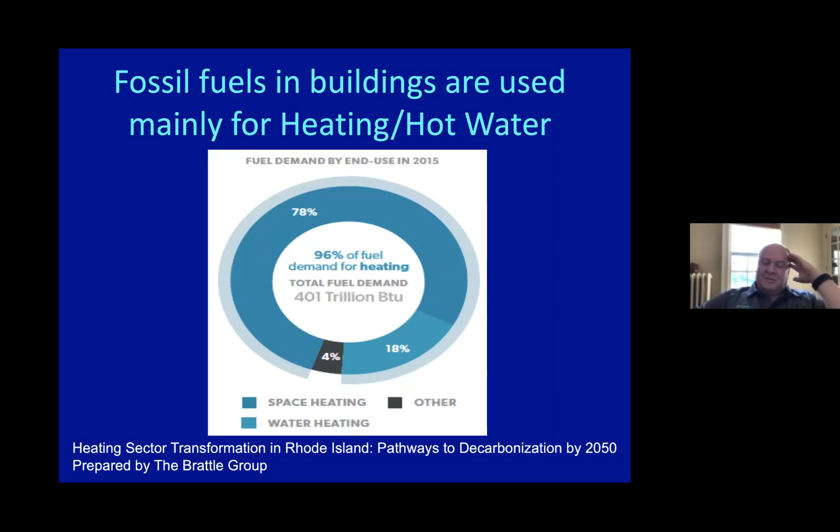And again, these are three different reports which were published. We'll talk about the New York State Independent System Operator Climate Change Impact Study, the first phase, their estimation of the long-term impact. Number two is the current capacity data, which was published with some delay because of COVID. They usually do that in the spring of every year, where they analyze the data from last year and look at their capacity and load data and what the implications are for long-term planning. And then the one I just mentioned is the heating sector transformation in Rhode Island and its pathway to decarbonization.

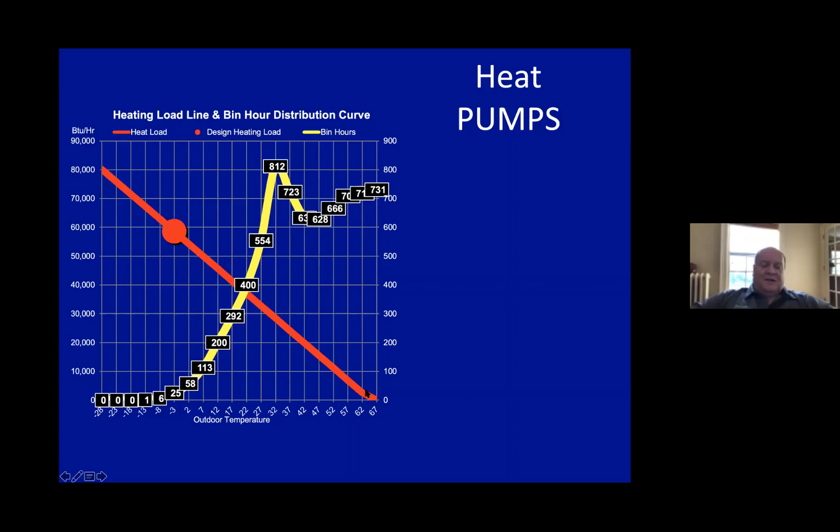So when we're talking about heat pumps, and obviously we don't have many other choices than to go the heat pump route, except doing this with fully electric resistance heat, it is important to understand how they operate and how the heating load might be different. So for example, the red line here is when you start heating a building at about 65 degrees, you start increasing load there. So the vast majority of the time, we're spending between 27 and 62 degrees. And this is when the amount of kilowatt hours we need to satisfy that load is going to be crucial.

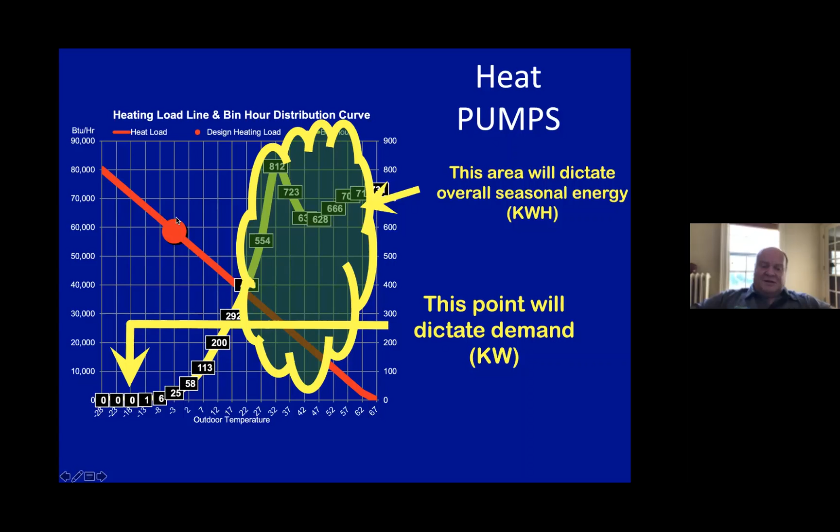The problem is that we're going to have a few hours a year, not too many, which will not look at the overall seasonal energy we use, but it's actually the so-called demand, which determines the amount we need to size the system for to cover the colder days of the year. So for example, we are seeing hours here beyond our design criterion. For example, in Buffalo, we're talking about 6 degrees, but we have days where it's -12. So we have to go beyond our design criterion.

Now looking at the demand, and why demand is important. Every single country who has actually transformed the heating process from fossil fuels into electrifying it is looking at a shift in demand. The best examples are Scandinavia, but all other countries which are starting to go into that endeavor are seeing their peak heating, their peak demand for electricity, shift from the evening hours into the morning hours, usually between 6 and 8 a.m.

The main reason for that is that the domestic hot water is shifted and now becomes electrified, but also that people sometimes use a setback during the night and then start to rev up the heating systems again, and the same is occurring for the office space.

So the point of the presentation is that replacing the propane and oil heating systems in New York State with either an air source heat pump or a ground source heat pump will have dramatically different results. And I'll walk you through why that is.

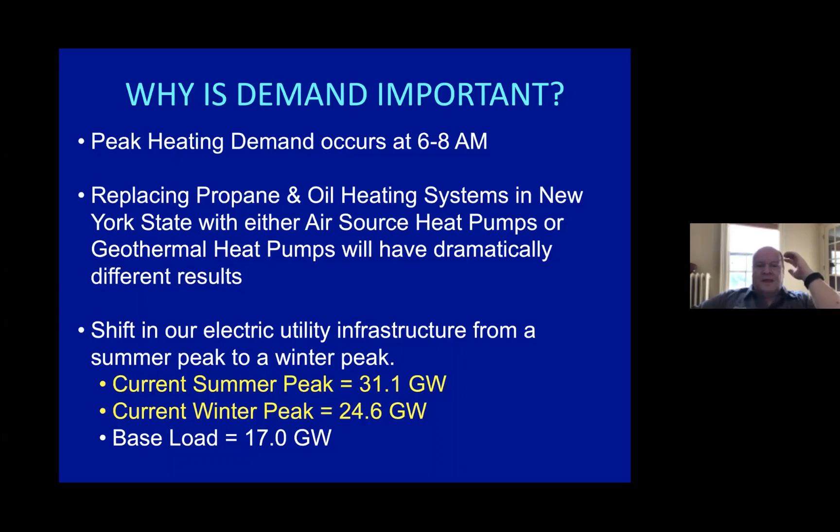However, air source heat pumps, and those are now the mini splits they took as an example, are decreasing that capacity significantly because they use the outside air as a source. The ground source heat pumps use the ground, which is stable. And in all the studies we have seen and done, and outside companies have done on behalf of some stakeholders in the state, et cetera, they have confirmed that the ground source heat pumps do not lose their efficiency or capacity. However, air source heat pumps do both.

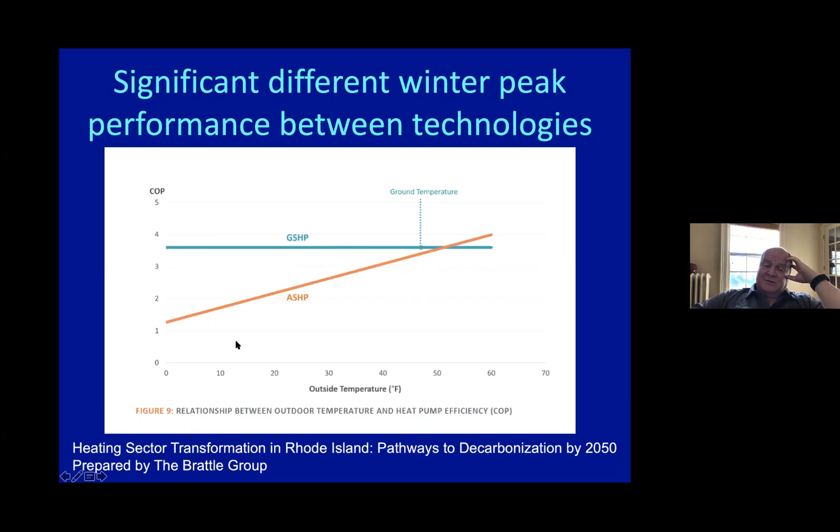That means they operate less efficiently because there's simply less heat outside at lower temperatures. And they go towards a COP of 1 when it gets down to around 0 degrees outdoor temperature. So just to point this out further, the efficiency and the capacity is dependent on the source temperature. That means the temperature of the ground in terms of ground source.

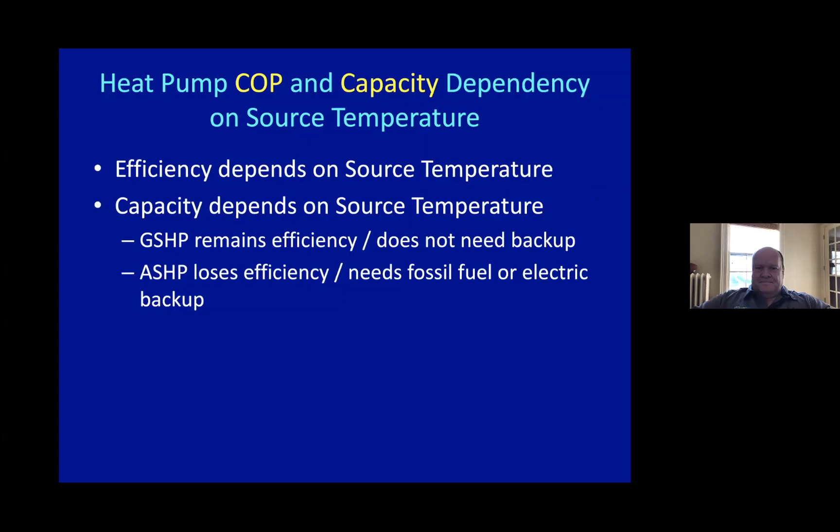And this is one of the reasons that the capacity of the heat pumps for ground source is not going down on colder days, and they don't need backup in order to be operational. And the air source heat pumps lose their efficiency, but they also lose their capacity at colder temperatures. And this is the reason why they do need fossil fuel or electric backup, at least in most applications we're putting them in currently. So that's going to have dramatically different results for the grid and the grid planning.

Not too much, but we saw a spike up to about 26 gigawatts. And that is pretty much the same way we see it in New York State. So the data is almost identical. Now they run different forecast scenarios. They said, okay, forget all of that. Let's not go with electric heat at all. Let's continue our current scenarios and see where we're going to be in 2040, 2050.

And because, you know, there's an increase in population, increase in demand to a certain degree, more buildings being built, they project that this goes up to 37 gigawatts in that scenario. Now, if we are all electrifying this with ground source heat pumps, yes, our overall demand for electricity goes up over the year, which is good. We're going to use more electricity. But then we also see a peak there going up in the coldest days of the year, which is approximately

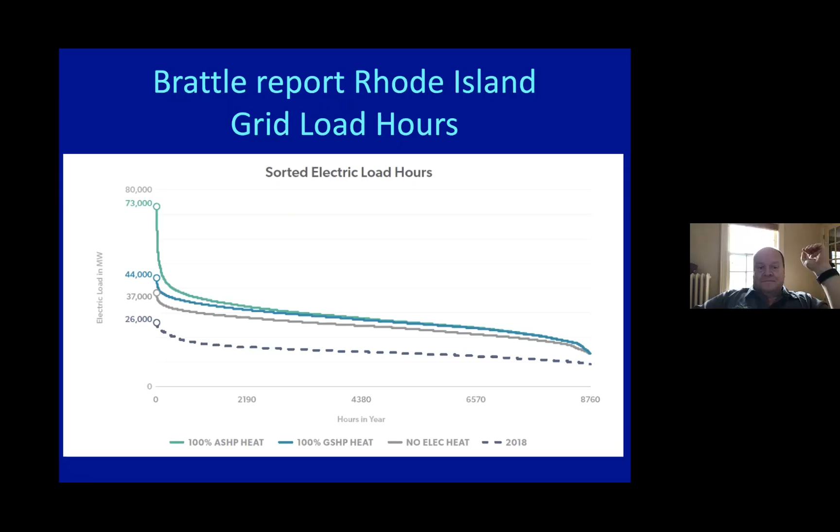So the impact for that is relatively tremendous. If we go this route with ground source heat pumps, the actual energy for the year is not that different between the two technologies. Yes, air source heat pumps are a little bit less efficient. It will need 15% higher capacity than we currently have in the system. And ground source heat pumps will only need an upgrade of 12%.

However, the peak is going to be looking dramatically different. The peak is going to go up by 17% with ground source. However, with air source, it would be going up 94%, almost doubling our readiness and our need for that. The important point from a grid perspective is that our load factor, that means how much percent of the grid are we currently utilizing, would be around 61% with ground source. However, it would drop down to 38% because we would have all this readiness sitting there at idle and not operating. It would be essentially the most inefficient grid you could imagine.

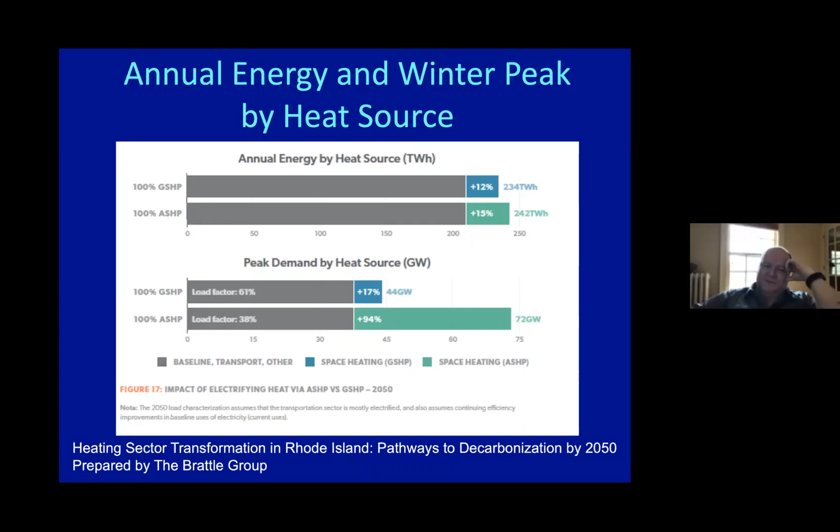And they celebrated this actually because every percentage point cost the New York State ratepayer about $200 million per year, because it is so much more expensive to have all this capacity sitting at idle, and it needs to be maintained and paid off. So having a higher load factor is really, really beneficial. But that's what we would lose here with the air source heat pump scenario because of their lack of efficiency at very cold temperatures, but we still would need heat during that time.

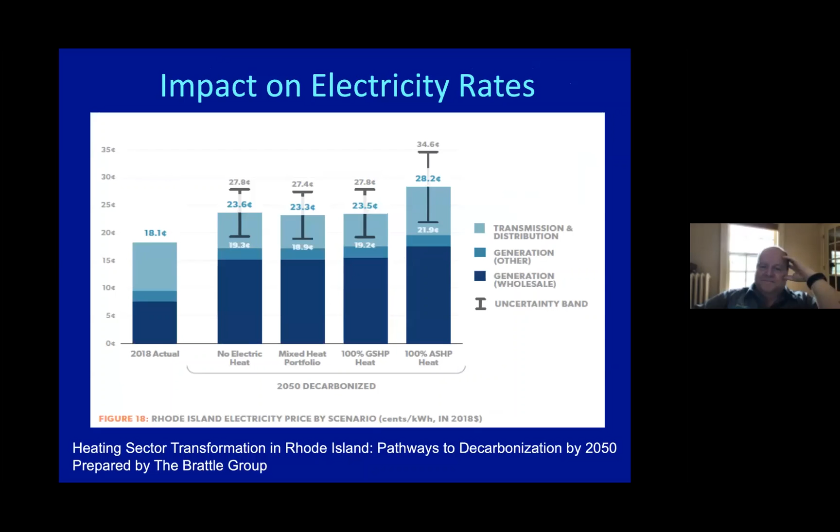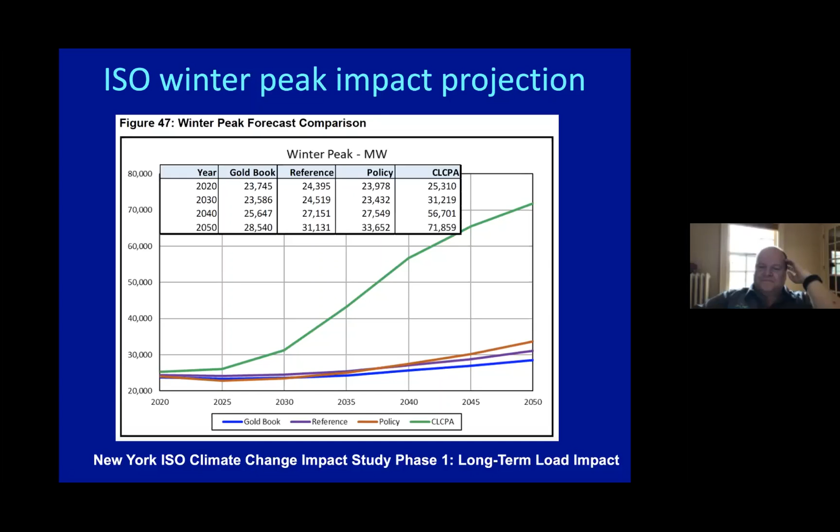Now, this is not the official number coming from the New York ISO, the independent system operator. This is just a study they had commissioned to assist them with their forecast. These are actually their official numbers. This is the so-called Gold Book, which is the Bible for capacity planning, and this is the 2020 load and capacity data. The problem was that they did not have those graphs in there. They only had the data in tables, pretty much at the end of it.

And there was a dramatic difference that 1 year makes between the implementation need for the climate bill and the year before. So I looked at their forecast a year before, which is the blue line. They show an increase in their winter peak going from 25 gigawatts to about 32 gigawatts. And you could say, over a time frame of 25 years, we can see the increase in demand and electricity. But oh boy, when they now have to comply with the climate bill, that changes dramatically, from 1 year to the other. Their forecast planning shows a very different result.

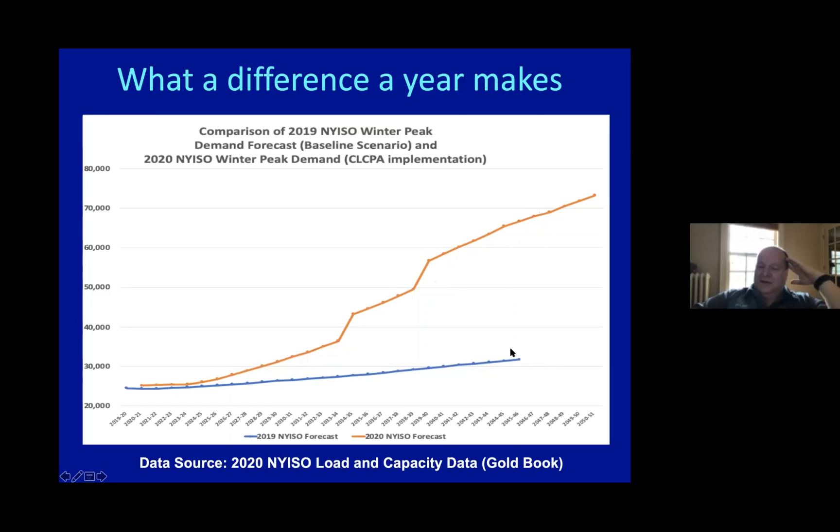They didn't go beyond 2045 in the 2019 period, but now they're forecasting up to 2050 because that's when the climate bill has to be all implemented. And you can see the dramatic shift here. It essentially more than doubles our winter peak in the entire system. The bad news, if I run the numbers, I think it's underestimated by a factor of 2. So I personally think this entire line is much steeper because they haven't fully accounted for the lack of efficiency. They just took manufacturing data and plugged it into their evaluations when it comes to air source heat pumps.

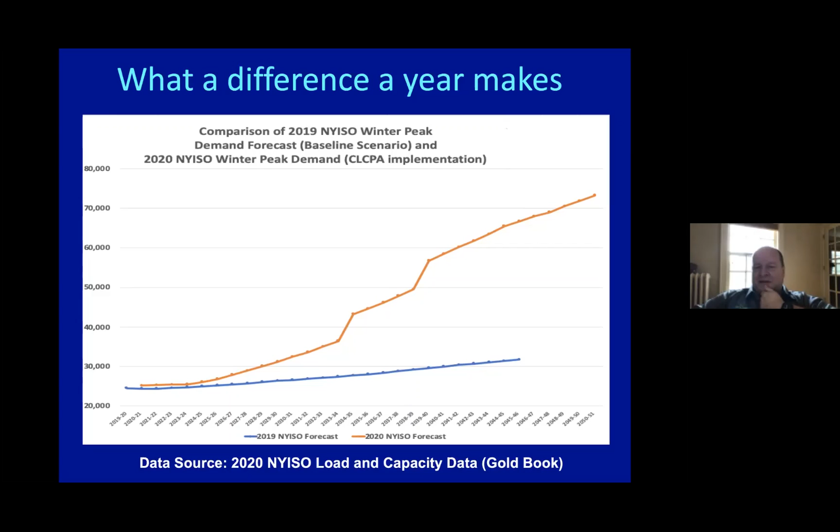We come up with a scenario where currently air source heat pumps are adding about 100 gigawatts to the peak load, and now you're adding the domestic hot water and the electric cars to it. You will find a dramatically different, even much worse scenario than their own numbers indicate. So again, these are their numbers.

So they have different scenarios there, and they carved out the increase caused by electric vehicles and the increase caused by the heating and the cooking and the domestic hot water. And you can see here the impact of the building envelope on peak, not the building envelope, the technology we use for that, is dramatic. Everybody talks about it and says, well, how are we going to have all the energy for the electric vehicles? But that number is dwarfing the impact of the heating sector if this is done by air source heat pumps as well as domestic hot water electric resistance heat.

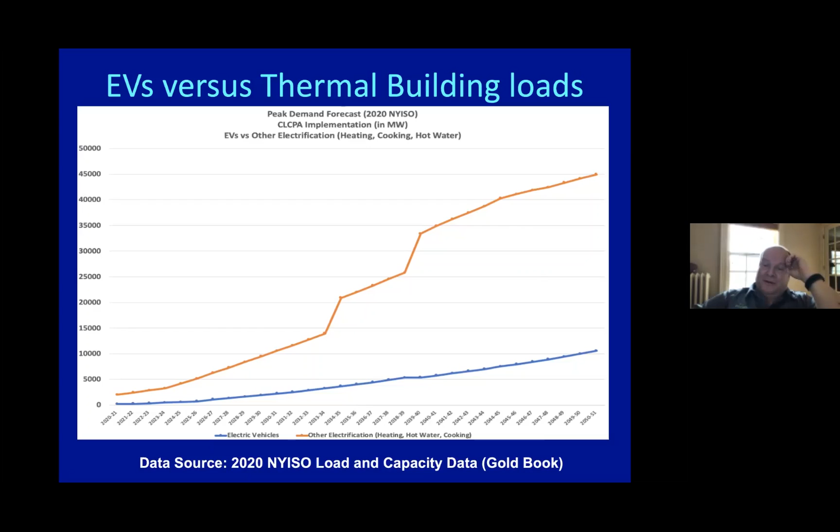Again, these are their numbers. We didn't change the numbers. We just put them onto some graphs to visualize that much better. Forget the need for electric vehicles. It's really the heating and cooking, which is essential in avoiding a dramatic grid impact here.

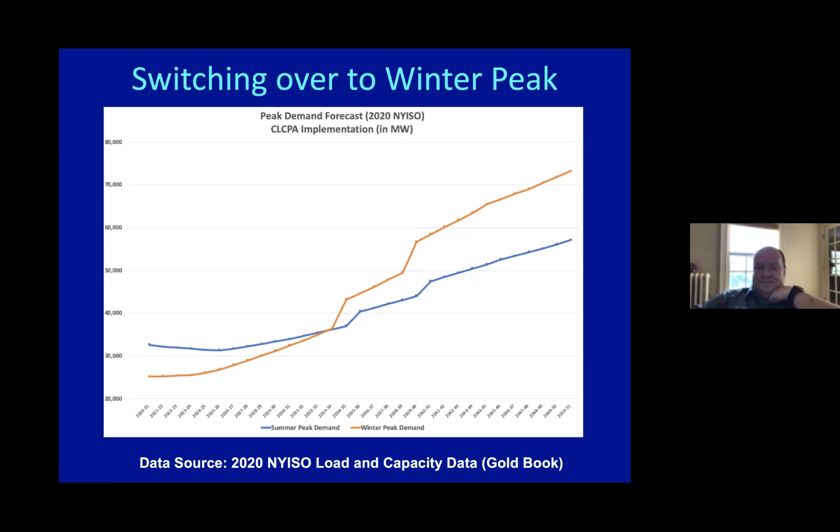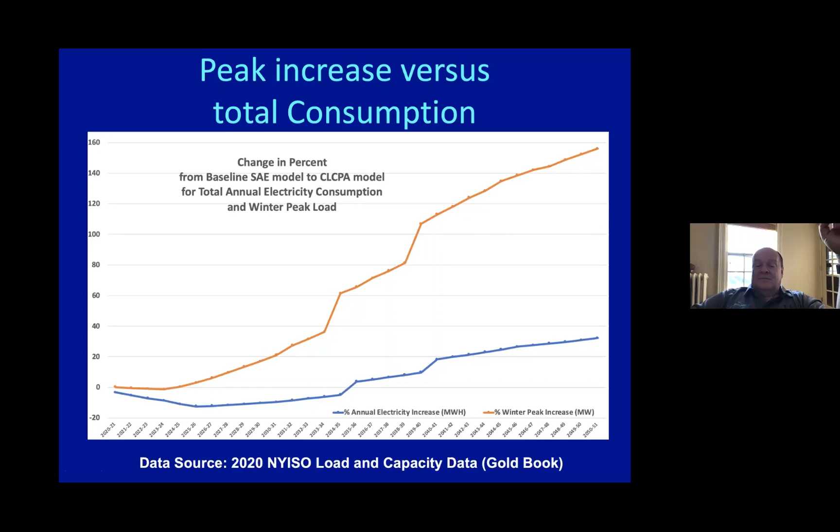So I mentioned before that I personally think that the impact of this is grossly underestimated. Why do I think that way? Well, if we're just looking at the entire heating load, which is now published by, I think it was the Meister Group who did the analysis for NYSERDA, we're looking at different buildings. These are the single family homes. We have close to 3 million in New York State. And then they're looking at the multifamilies, the large multifamilies, and adding the commercial sector to it.

And you can see here the million BTUs they use per year, and this is actually current actual data. We see that the buildings in New York currently have a winter peak of close to 100 gigawatts. And that's why we think the numbers they have are grossly

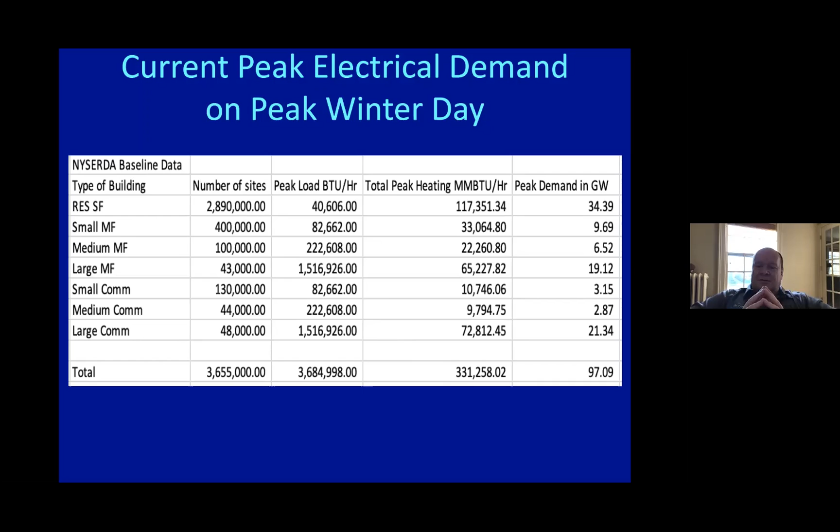underestimated. Now, they're counting on a lot of increasing efficiency in buildings, but we question whether they can retrofit those buildings at reasonable costs to perform that much better, to say, no, this is not 97 gigawatts, we think this is only about 45. Currently, it's 97.

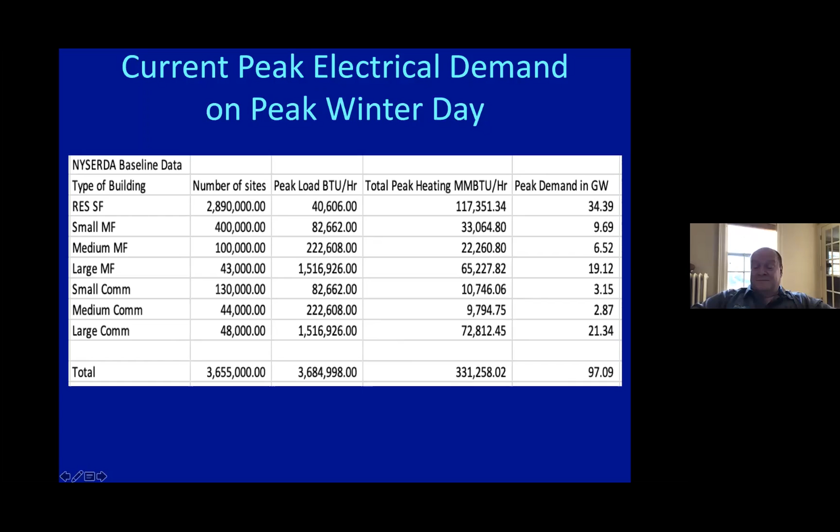So that's one of the questions why I'm questioning whether we're going to have the right matrix sometimes when we are looking at the amount of energy only and how much we're consuming. Because the green bars show you that we have a certain amount of energy we use, and we're looking at how much energy we're avoiding and how many carbons we're saving.

So air source heat pumps look pretty good. They actually take away the electric resistance heat, and then geothermal look actually much better. However, this is why we have a good amount of incentives for our total amount of energy savings. And then we have higher incentives for geothermal because they save more.

The problem is the black bar now shows you what is the projected amount of peak they avoid. And nobody really looks at that because we're focusing completely on the total amount of energy saved and the total amount of carbons avoided. But we have to start looking at how much is this all going to cost us, and how efficient is the grid then, and how much are we going to have to add to the rate down the road to make this all feasible.

And you can see here the difference between electric resistance heat and air source heat pumps. We need to put exactly the same capacity in because we're going to need it. But it will be an extremely inefficient way of dealing with it because we're building a capacity which we only use a few hours a year.

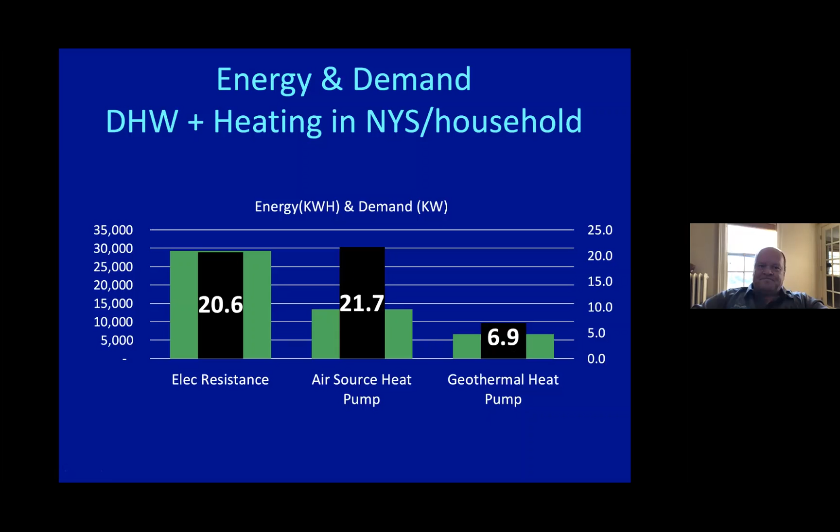So it becomes very clear what the heating system for the future has to be. It must operate in a way that their efficiency and capacity is not dependent on the outside temperature. Because when we need it most, we cannot afford to lose capacity and efficiency on the coldest days of the year. It also must cover the full load without going into supplemental resistance heat. Imagine when all the heat pumps in the state are going into supplemental resistance heat at a COP of 1 at the same hour. It would completely collapse the grid.

It must not only reduce the heating, but also the cooling load, because the summer cooling load is going to be significant as well. And keep in mind, we're going to shift a lot of the electric hot water load into the electric grid. So we're going to actually add to the summer peak, unless we have smart ways to store the energy, use it at the off-peak time, or avoid it entirely and make it with a much, much higher efficiency.

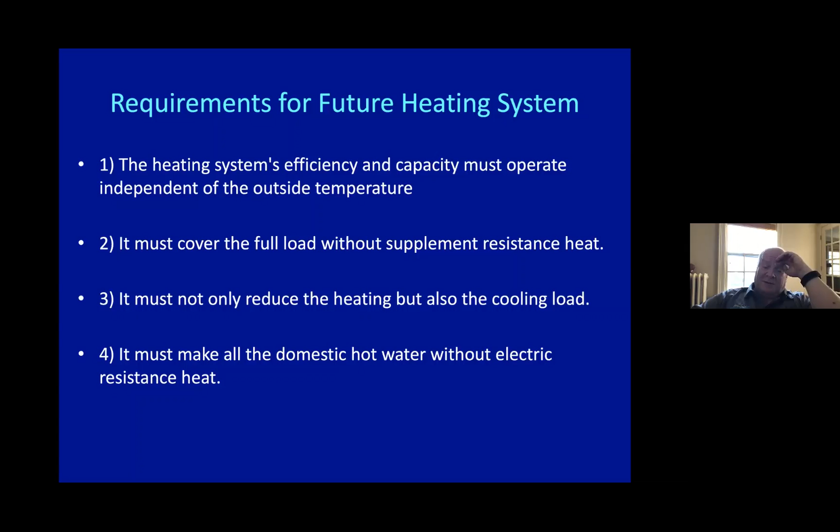And that's the fourth point, that we cannot afford to make the domestic hot water with electric resistance heat, because specifically the hot water usage coincides with the peak in electrical demand for winter heating. And so we have to do whatever we can to either shift that to a different time period, or to avoid the inefficient way of making hot water to begin with. So hot water will be a tremendously important part of the puzzle here, and of the plan to go forward.

I explained before that we are starting to have, under those guidances, design systems which fulfill all those criteria. We now have the geosystems all on one borehole. You can see here the pipes coming in. There's one pumping station, and it serves a forced air heat pump doing heating and air conditioning, but it also serves an independent water heat pump, which can make all your hot water, store it in a tank, and we can control that with a timer. It makes it with approximately 350% efficiency, but also it can be timed and stored. And that's one of the important aspects here.

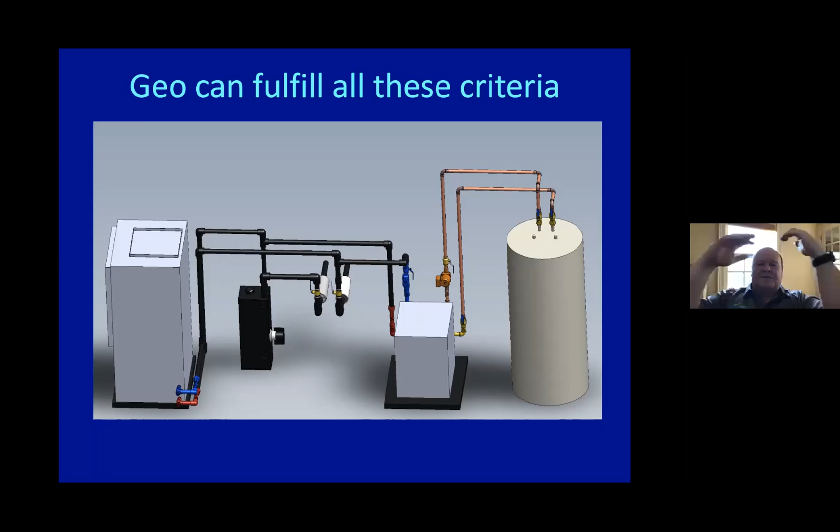So, a couple of things which we should probably think about. Should we push to have air source heat pumps installed only where ground source heat pumps are not feasible? Is it good public policy right now to say, yeah, let's go ahead, it's going to cost us the same, or maybe a couple thousand dollars more to put it into a new build, but it's cheaper for the person to install, and yeah, it creates a nightmare for the grid, but that's not the problem of the person? So should we have a more direct policy where we reserve air source heat pumps only for areas like dense urban settings where ground source heat pumps are not feasible?

Is our current notion for technology neutrality feasible? You know, regulators always like to sit there and say, well, we're going to tell you the rules, and how you get there is up to you. We have an obligation not to favor one technology over another.

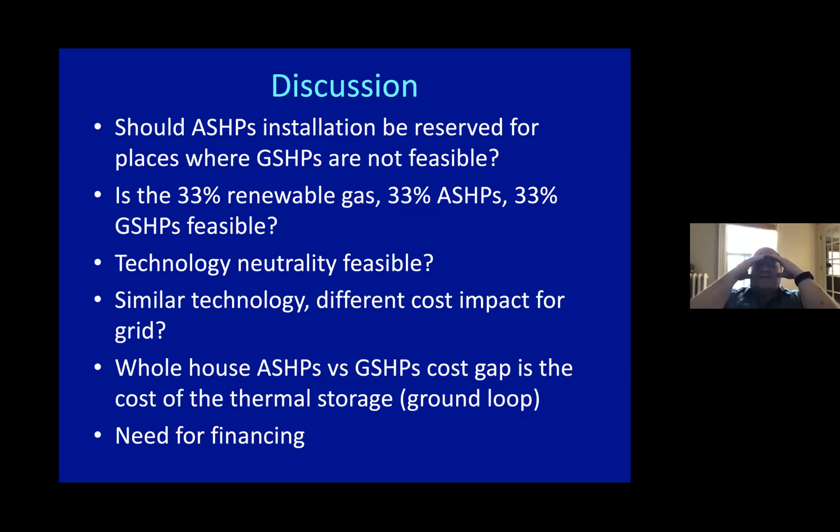Now imagine you would have solar and a large enough storage which can deliver the storage for the electricity the solar is producing for 6 months to get you over the winter. If you would have a battery which can store the solar energy you need for your house for 6 months, and all that on a 6-inch footprint, which is the diameter of the borehole, we wouldn't need a grid anymore. And that's the value which the ground loop is bringing to the table.

And this is something people need to philosophically understand. It's really a storage capacity, and there's an enormous amount of storage the ground loop brings to the table. It stores easily over 100 million BTUs down there, and it's accessible on demand. How much is that worth? Because if we don't look at how much that is worth to the grid, the cost of mitigating the deficiencies of not having that storage built in is tremendously higher in the system per household.

And that stresses the need for financing, maybe. And maybe it's a smarter way to put the money into a distributed storage solution, which the ground loop is, than having the capacity built in to generate all that electricity on demand at the worst time of the year.

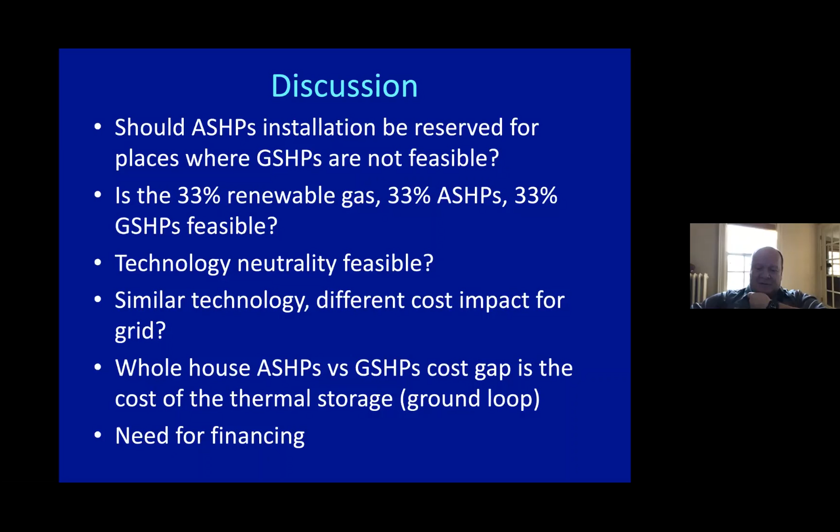And that's the kind of discussion I think we should have and we need when we're talking about technology neutrality, or whether public policy needs to enter in and say we can't allow that to happen. We can't actually afford to build the least efficient technology scenario here for the grid. Anyway, that ends my slide.